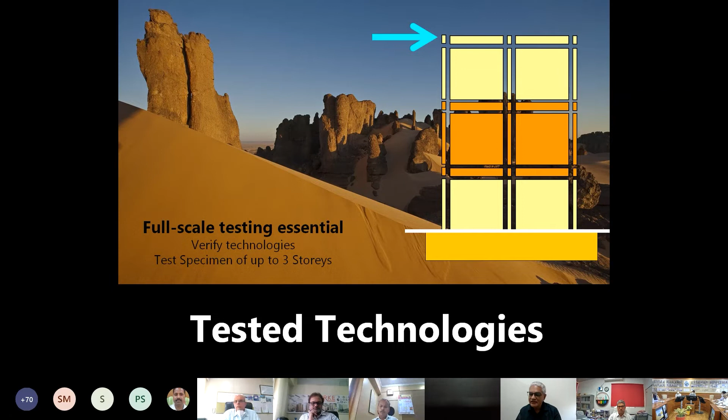Also, I want to clarify that just testing beam and column junctions alone is not going to clarify the system behavior. That is essential to understand local behavior, but system behavior will have to be done in a full scale, full prototype way. Now let me spend a little time on the new technologies.

So the basic nature of our new technologies are that mostly they'll be modular type, except the 3D printing, and then they have standard sizes of components which are made in the factory, and they are joined through operations at site. So what are the advantages? Great scalability, speed of construction, and superior quality control.

Perfect. But on the other side, the heavily weighing down items for us are that we do only structural analysis and we don't check the behavior of those structures. And then the design of joints, the dry joints, their behavior is unknown because it has not been quantified. The quality control of the joints depends on the skill of the workers.

So where do we go? The route for us is that we need standards for design and safety assessment, which are not available in India right now. And we mostly rely on assumed behavior, and similar behavior with the counterparts of the in situ construction is what we are expecting, and we are assuming and going ahead. If you look at our Indian standard also, that is there with us, it is saying the same thing.

Now, the process of standardization requires full-scale testing at the top, then of the sub-assemblages to begin with, then the full system, and then repository of the test data. That means one test, two tests should not lead you to conclusions. You should look at similar tests done worldwide also, collect all that data, and then prepare a draft standard, peer review the standard nationally, internationally, and then prepare a final standard and take it to the standards body for approval.

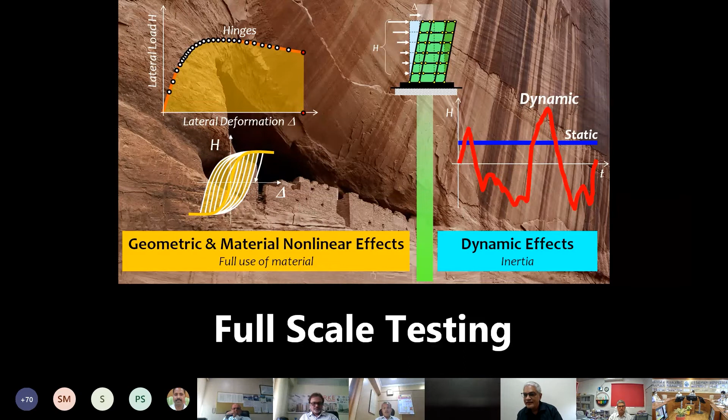And that has to be quantified, and analytically we can make mistakes in the strength and stiffness modeling, and so we can get incorrect answers. And that is why dynamics is so crucial for us. Why does full-scale testing help us out? Because it accounts for the actual behavior, the way it will happen when shaking is provided.

What are the candidate systems for full-scale testing? All structural systems have to go through this full-scale testing model, all of them. Especially the ones which are jointed systems like precast, pre-engineered, pre-stressed. These have to be definitely put through this test. Then we are looking at non-structural elements also to be tested.

The success of a technology is not when just the structure is safe, but also the non-structural elements are safe, especially in today's context where it accounts for 60 to 90%, depending on the type of the building that we are looking at. If it's a hospital, it'll go to 90%. If it's a modest residential multi-story building, it'll go to 60%, and others will fall in place in between. So we're looking at furniture, facades and services, and in services, piping, wiring, all of those will have to be examined as to how they will behave in the full-scale testing.

The comparison of precast and cast-in-situ is important to make here because we will understand the rigor required for doing the full-scale testing. We have products manufactured here in the factory and they're process oriented and multiple units of the same are made. So the advantage is that they are simple and modular in nature. Often mass housing is where it is. Now when I look at mass housing, I have one particular design approved and it will go to construction of 60,000 houses, 20,000 houses, 7,000 houses. So one mistake will get amplified so many times, with 5 people per each apartment or flat.

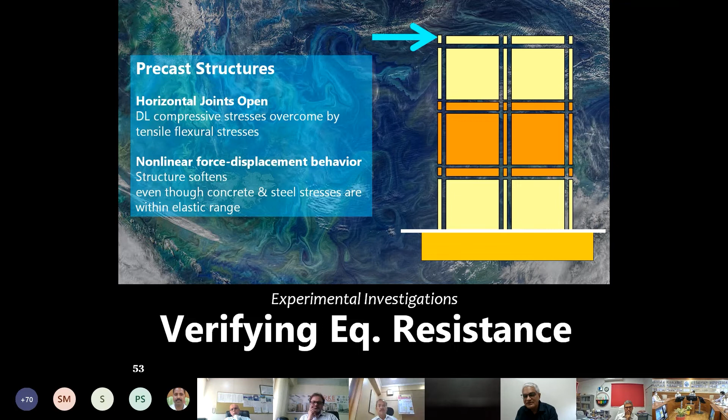The structure also becomes softer, meaning that it gets damaged and then it loses strength and loses stiffness also. Even though concrete and steel stresses are within the elastic range, even if damage happens, you will see the softening happening. But even if damage doesn't happen, because of the opening and the sliding, the slip is actually going to make the structure become very soft. And that is not acceptable to us, that the structure will swing more than what the non-structural elements can take.

So technology development depends on the various vendors. If a vendor says, look, I have done all the design and nonlinear analysis, please do testing only for me, then you do technology qualification in that case through full scale testing. If the vendor says, no, I have done only design, I have not done nonlinear analysis and testing, then we will say, well, we'll do technology certification.

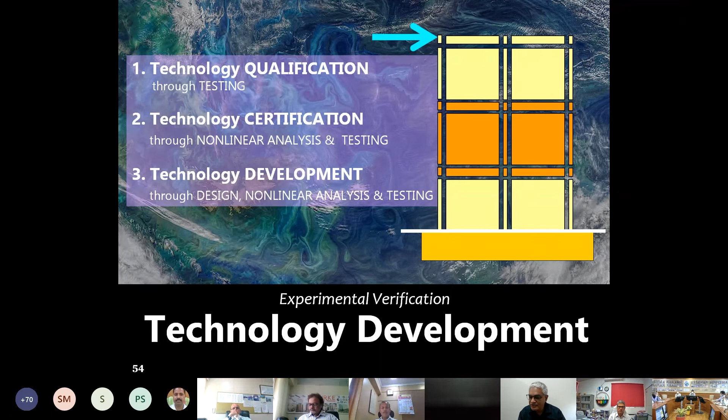But if a fresh entrepreneur comes or some idea comes from somebody and says, please develop this technology, then we have to go through the whole route of design, nonlinear analysis, and full scale testing. So depending on the level at which the vendor is, depending on the background work that the vendor has done, we should be able to take on either qualification, certification, or development. Technology qualification, technology certification, or technology development. This is the route that we have to take when we interact with the various vendors.

So what we learned is that technology development has two essentials. One is testing, evidence-based, and then standards, which are evidence and experience-based documents. Both of them are essential when you approve any technology, especially under the banner of CPWD or the governmental systems. It would be appropriate to put a front foot forward confidently, and your confidence will depend on whether we have done full-scale testing and whether we have the due standards for it.

Just to give you a glimpse of the international scenario for earthquake resistance of precast systems, there was a project in the 1990s between the US and Japan called the Precast Seismic Structural Systems. They wanted to develop innovative seismic structural systems and to formulate design recommendations. So it's a 10-year effort, and they concluded very modestly that select systems alone can be taken forward.

Similarly, in a 3-year period in the European Union, 16 partners came together from industry, professional associations and universities from 7 countries, and they did more than 100 cyclic and dynamic tests in various laboratories across those 7 countries. The tests were on sub-assemblages and especially their joints, focusing on floor to floor, floor to beam, beam to column, and column to foundation connections in a very precise way.

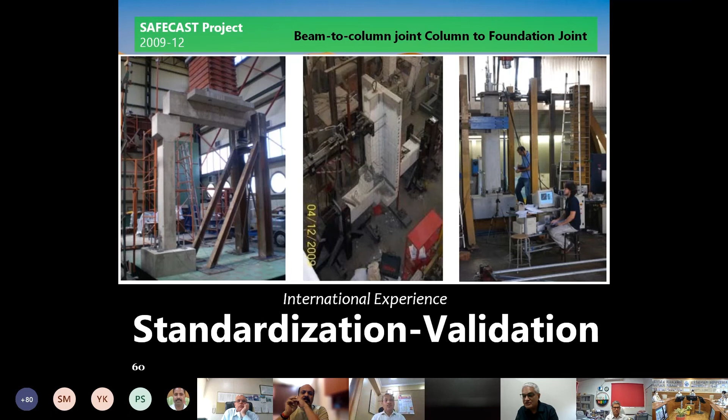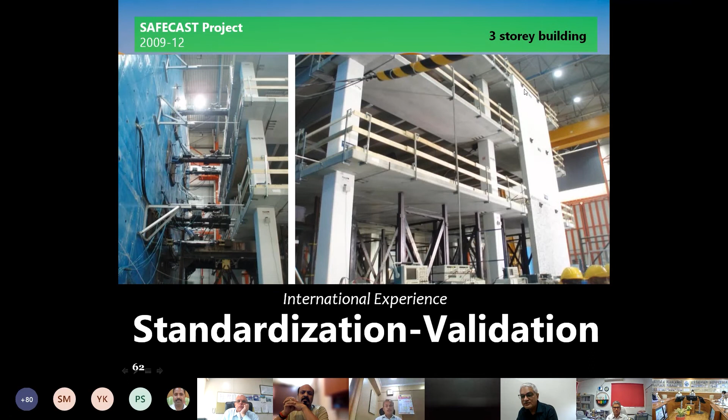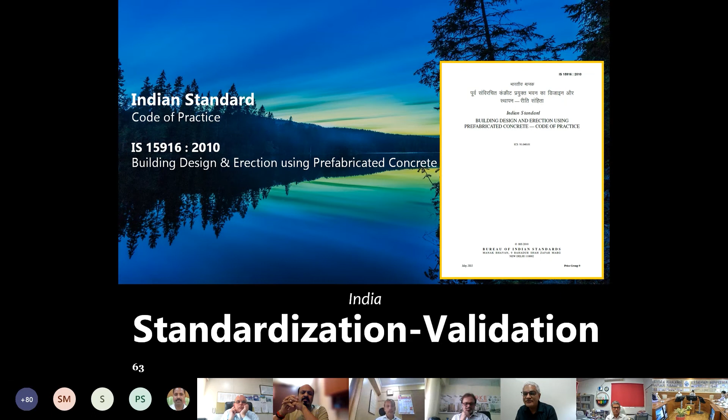So what's the story at the Indian front? We have an Indian standard, Code of Practice 15916 for building design and erection using prefabricated concrete. That's the one that we have in the Indian context. It says that precast structure should be analyzed as monolithic one.

Now that's a tough statement that the Indian standard is making. If we were to revise this standard again, we should drop that sentence. We can't say that precast structures are monolithic structures. They can't be analyzed that way. Joints have to be modeled, and you will see a lot more lateral deflection than what you will see in the normal context of monolithic structures.

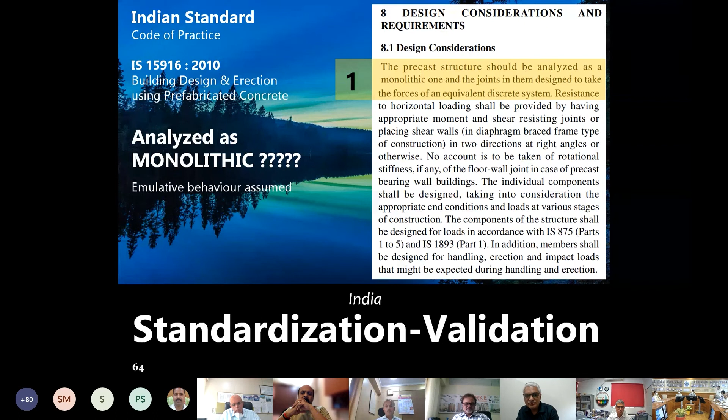So this emulative behavior is not going to come at all when you look at it. You can go close to it, but you can never achieve it. So it'd be improper to use monolithic behavior as the basis for analysis. Second point is the resistance to horizontal loading shall be provided by appropriate moment and shear joints or by placing shear walls. Well, we got lucky because they made that shear walls included in that.

If that was not there, it would not be possible for us to make precast construction joints behave the same way as monolithic joints. Not so easy. Moment connections and shear connections. Shear, especially when there is a full cut crack through, how do you make shear connections? Only steel has to carry that entire shear. So the bar diameters will become much larger. And so this segment also requires a relook in the Indian standard.

And the third statement it's making is components shall be designed in accordance with 875 parts 1 to 5 and 1893 part 1. Right? Now 1893 is placing the seismic demands on us, but is currently not giving you the seismic displacements. And that is where a little worry is. In the revision, we hope that we will be able to address seismic displacements also.

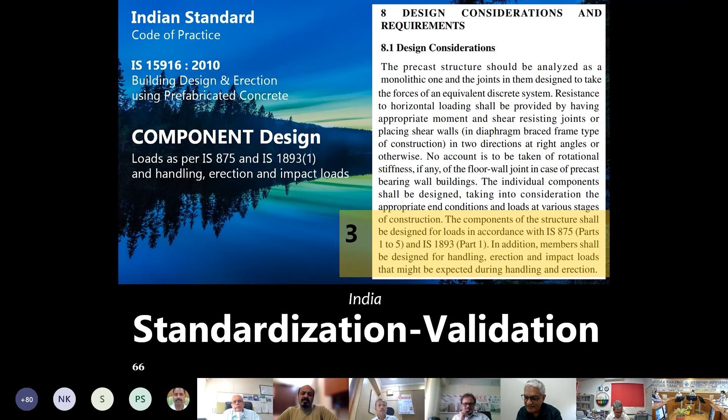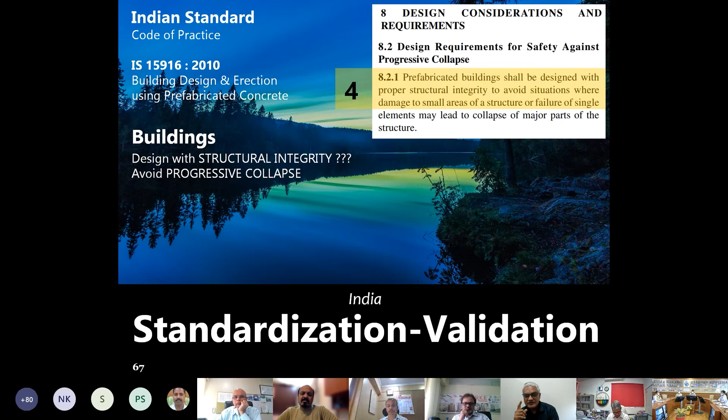Prefabricated buildings shall be designed for proper structural integrity to avoid damages where single elements can cause collapse. So we're talking about progressive collapse in this particular requirement, but structural integrity is something that some of the systems don't provide. And that is where the worry is, that this current document here is insufficient for us to guarantee safety in the Indian context.

So what India needs is to capture nonlinear behavior under earthquake loading of all the technologies that are being proposed by various organizations. We need to have a new standard for testing, and we need a loading protocol and a criteria for acceptable performance. And this is where the entire headache will be for governments, that when earthquake happens and there'll be a certain damage, people will say, you said no damage and this has happened.

So we have to clarify a priori that damage is going to be admissible and certain type of damage only is admissible. This is the clarity that you must have from the beginning, in technologies in which damage is admitted. There will be technologies in which no damage is admitted. That will be a separate set altogether. So we have to write down loading protocols and acceptance criteria for these new technologies that we have.

So as we are speaking, Professor Bharti and a team of colleagues in the Bureau of Indian Standards are in a working group which is developing the standard for seismic testing. We pray that this work can go forward, but it can go forward only if CPWD and the entire Indian industry comes together to build the necessary testing basis, which we said was the required one for going forward to make this standard come out in short period of time.

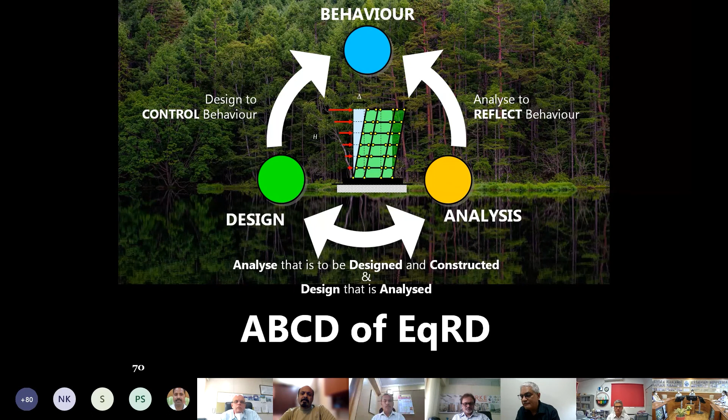So coming up with a new technology or approving a new technology will require a very careful nurturing and upbringing of the technology from its nascent idea stage to the final product and the standard stage. Just to clarify, today if you want to do full-scale testing in the country, there are two institutes where we have created facilities. One is MNIT Jaipur, another is IIT Kanpur, and they have capability to test full three-story structures. And if all the organizations which are interested in developing technologies come together, these two test facilities will get busy, but they might become insufficient.

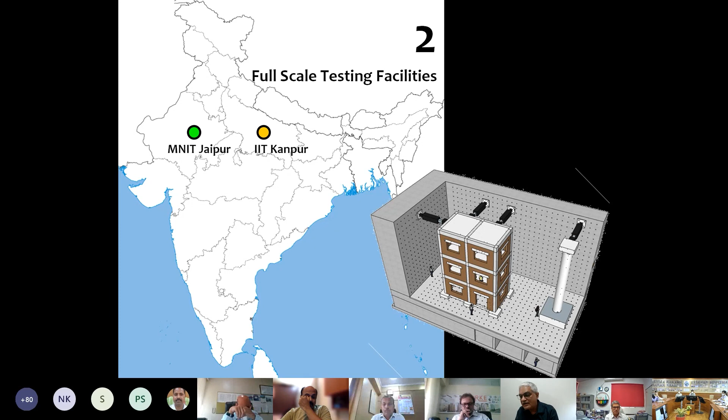So in the long run, we are thinking of adding more such test facilities in the country. But interestingly, even though these facilities are available for long, especially IIT Kanpur, we did not see much of the organizations coming together and asking for full-scale testing to happen. And that is where I would say there needs to be a cooperative and collaborative effort of a detailed R&D between industry, academia, and government in the time to come.

The expectations are rising in time ahead when you look at the way the government projects are coming out so fast and quick. We were doing intuitive design in the early days, and then we moved to prescriptive design, where from concepts we graduated to structural safety standards. And then we are looking at performance-based designs now. People are asking functional expectations. Owners are asking that I don't want damage, I don't want this much downtime, and so on.

And then there's a risk-based design that is up on the horizon, which says life safety and retrofit expectations have to be limited, right? And then we're talking about resilience. I want to come back quickly after an earthquake and not lose too much time, right? And this is where we stand today. We are at the prescriptive design stage in the professional practice. And what we are talking about, the new steps, new technologies are going towards code exceeding designs.

See, for example, wind will urgently require you to do performance-based design. Earthquake will require you to do risk-based design. And then if you're looking at other disasters like blast and others, you are looking at resilience-based design. So I would pray that in time ahead, we have to have a cadre of engineers who are actually looking ahead and closely working with these test facilities and industries to create the required design documents and standards for approving new technologies.

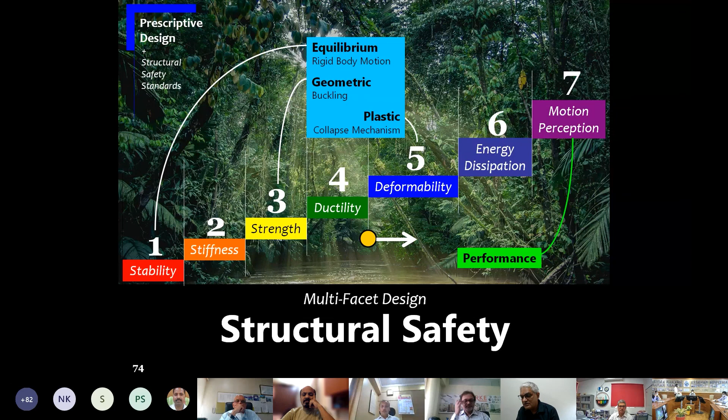I'm so happy that CPWD decided to take up this subject by the horn, and I'm confident that in a couple of years from today, you will see major gains coming out of this entire effort. There is multifaceted design also in structural safety, and we are still in the modest early stages of ensuring levels 1, 2, 3 and 4, and we are yet to get to 5, 6, and 7. So, what I'm saying is the industry and institutes all are in the growing stages and very steep learning curve stage. We have to work together to make all this happen.

You will recognize that earthquake engineering is not just engineering, but it is art in engineering because it has to balance safety, functionality, durability, aesthetics, and economy. But this time around, if you want to approve new technologies for seismic applications, safety has to be on the driving seat and not economy or aesthetics. The top three are non-negotiable in that order. First, safety, then functionality, and then durability. The only compromise is between aesthetics and economy: if you pay more money, aesthetics goes up. If you pay less money, economy goes up.

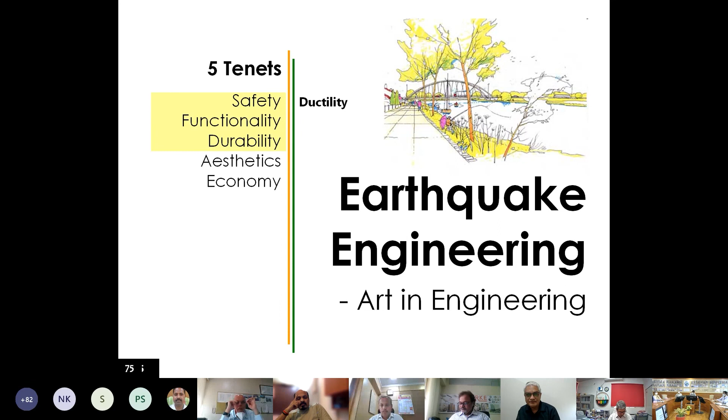Otherwise, the sequence is more or less frozen for us because you can't have a structure that is functionally acceptable but not safe. On the other hand, you can't have a structure that is safe but not durable. And that is where those three are going to be sitting on the driving seat and the rest will have to follow suit.